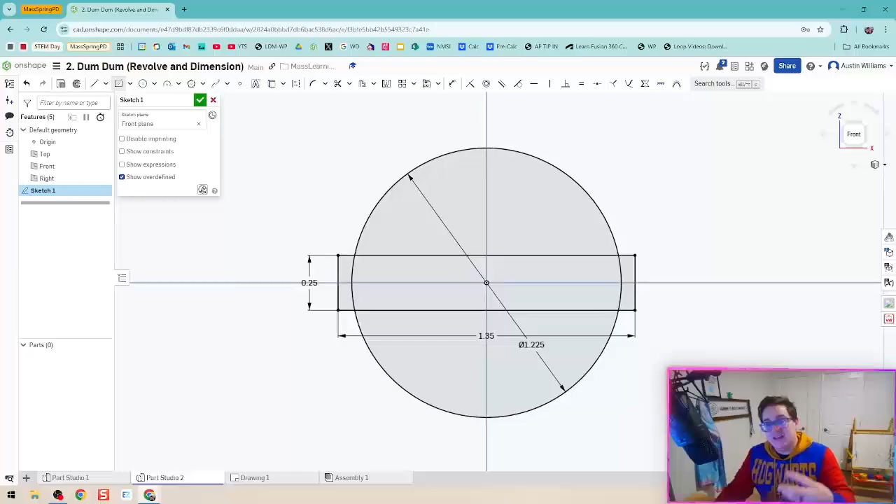Hit R for rectangle. We're going to look at that origin point, and we're going to click once at the center of that origin. And then the second click is going to be approximately where we want that rectangle to be. Again, we're going to type in those dimensions. That's 1.35 and then 0.25. Looks good to me. That second geometry we put in there, that rectangle, is now fully defined. Everybody's happy.

One thing we're ready to hop into is drawing our stick geometry, but we might run into a problem if we use a center point rectangle, because we're like, well, where's my first click gonna go? And trying to figure out, it's just difficult. So instead, let's use a corner rectangle. In this little drop down right here, you'll see corner rectangle is another option.

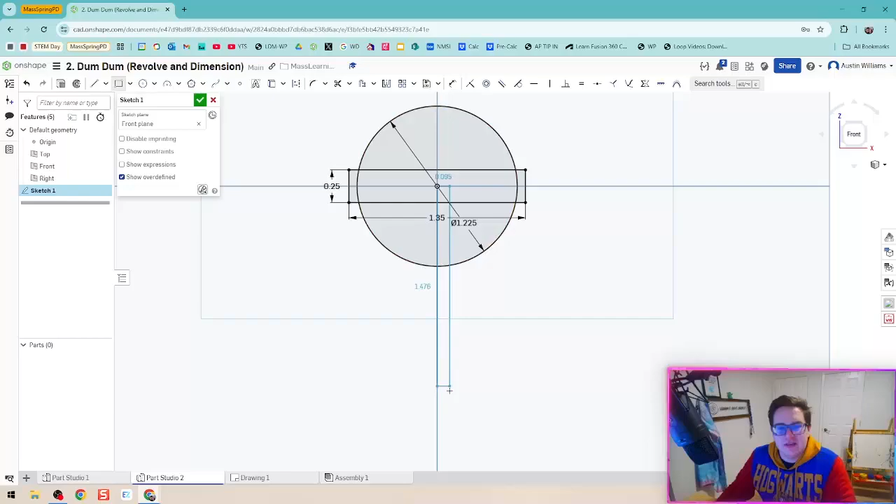First click is gonna be the center origin point. Second click is gonna be approximately where the other corner of that rectangle is going to go. Hit D for dimension, and that's going to be 2.5 inches in length, and then I have this as to be 0.125. Nope, 0.08.

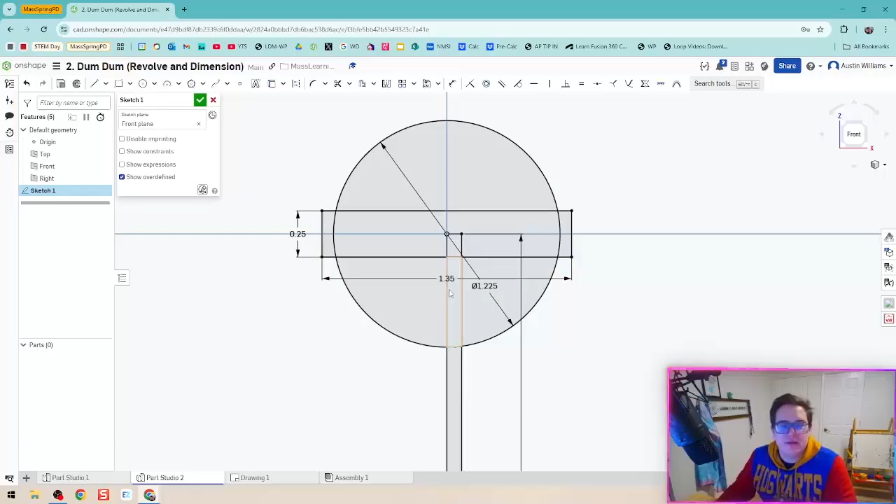Alright, what we've got so far is we have our profile for the sucker part, and then we actually have our profile for the stick. We're going to have to model them separately though, that way they don't come out to be the same part. We're ready to hit the green check mark, and we're ready to roll.

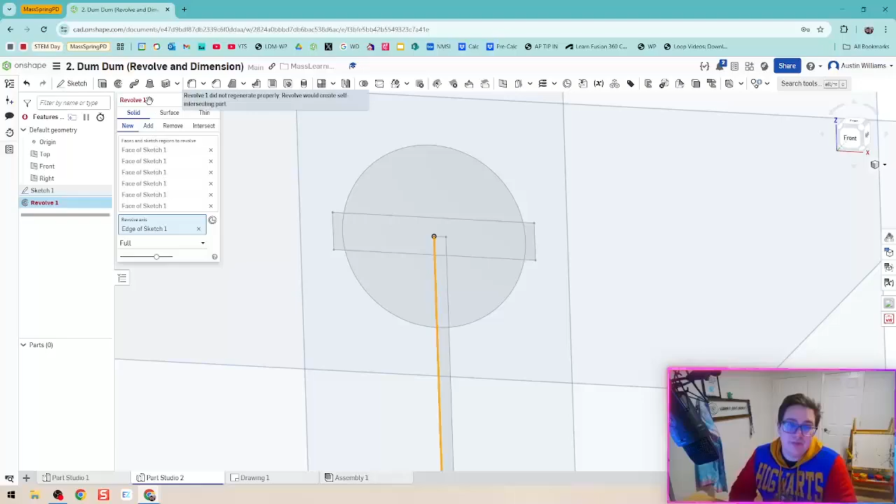Next thing I want to do is use that tool we have never used before called revolve, but we're going to run into an issue and we're going to fix it. If I try to use revolve and say I want this sucker to revolve around a center axis, you're going to get a problem, and it's going to create a self-intersecting part. When we revolve, we can't revolve a full 360 when we look at both sides of our sketch here. So we have to only have half of our revolve there to revolve the full 360. So let's hop in, let's check it out.

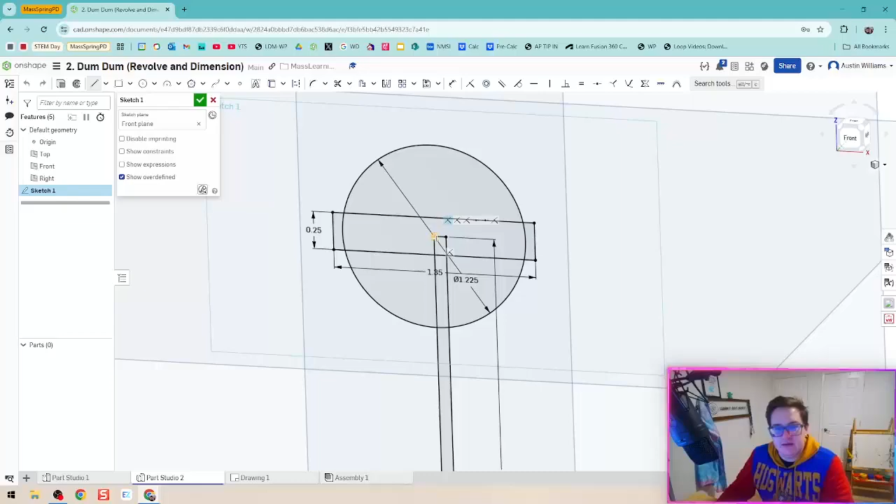So I'm going to edit that sketch, and I'm going to draw a line that's going to cut all the way down through my Dum Dum. So now I've got completed profiles on the right hand side that I can use, and that's what we want. This left hand, actually, we're not going to be using. So hit the green check mark. We're ready for the revolve.

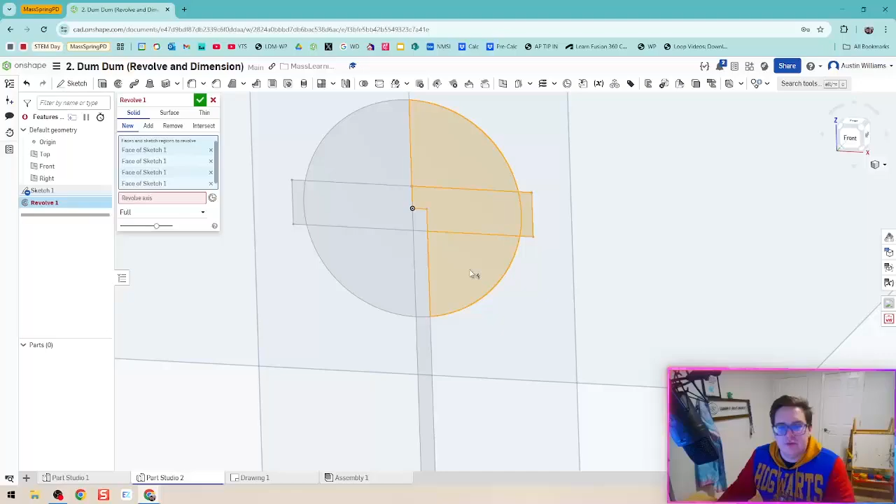Click on all of those profiles we want to revolve. The next question it's going to ask us is, what is our revolve axis? So we click on revolve axis, and then that center axis that we created, now we've got our Dum Dum sucker made. Hit the green check mark, and we're ready to make our stick.

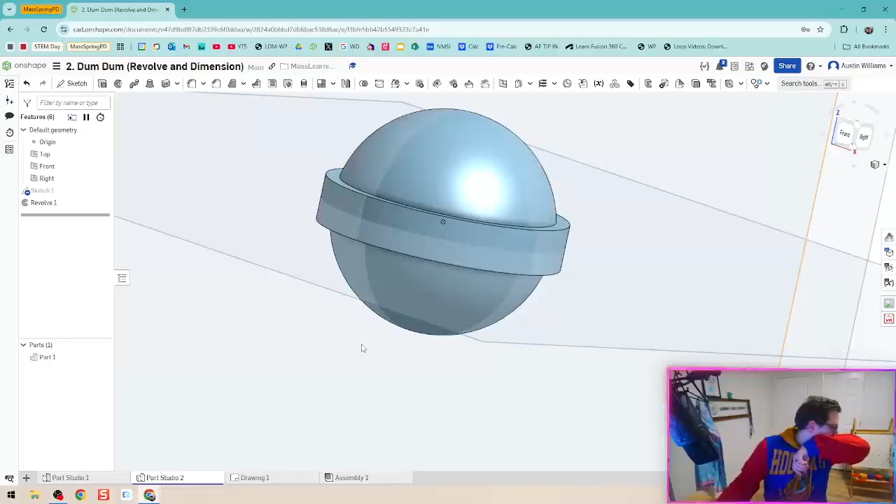Hopping into the stick, well, we notice our sketch is gone. So where did our sketch go? On the left hand side, you'll see your sketch is grayed out, and that's because it's been consumed. We are going to click on that little eye icon and make it visible again, and that way we can use it one more time. So I'm going to go ahead and hit revolve. Click on these profiles here.

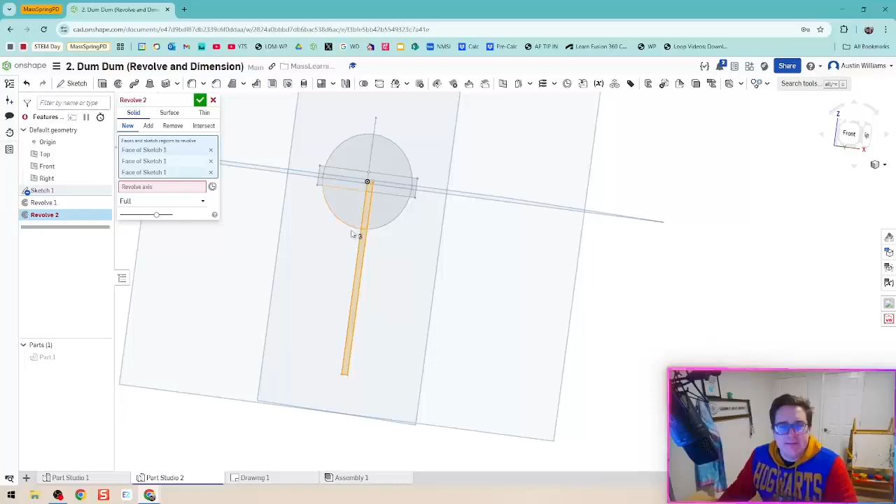If that first revolve is in your way, you can also toggle that part to be inactive. That way you can see those pieces a little bit easier. And then that revolve axis is going to be that center axis. Click the green check mark. And then make that part 1 active again. And there we go. We have officially made our Dum Dum.

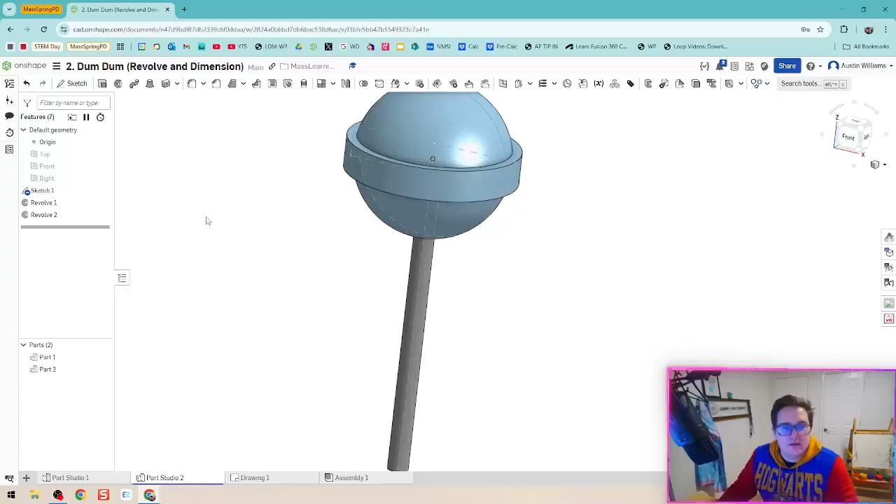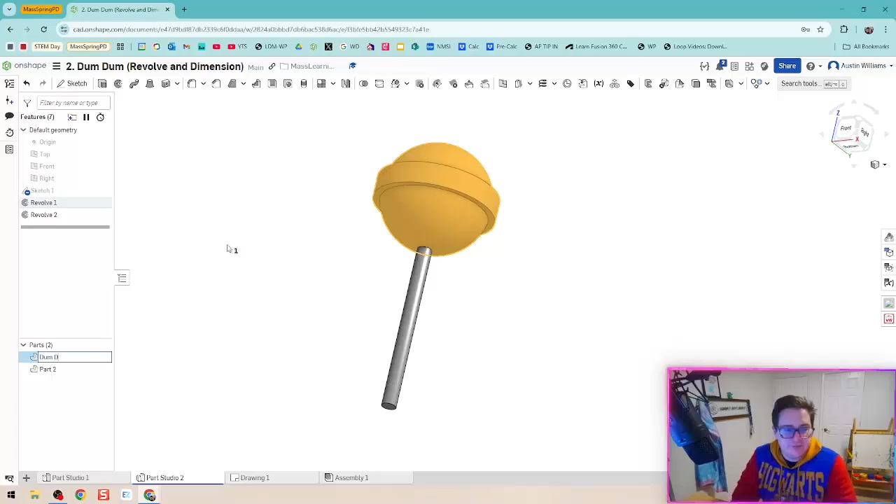Let's clean up this space a little bit. I'm going to go ahead and make my top, right, and front planes inactive, along with that sketch, so we can see only the things that we want to see. Now we're ready to do some other commands of changing this geometry that we created. One is we want to name it. When you get in the habit of using something, you want to make sure that you name it correctly. So right click, rename, and this is going to be Dum Dum. And then right click, rename, and this is going to be stick.

All right. I don't know about you, but in my opinion, the best Dum Dum flavor has to be blue raspberry. So we're actually going to apply a blue color to it. So I'm going to right click and edit that appearance. Let's find a nice blue color. Looks great. And then that stick is going to be white. So we're going to right click, edit appearance, and add a white color to it.

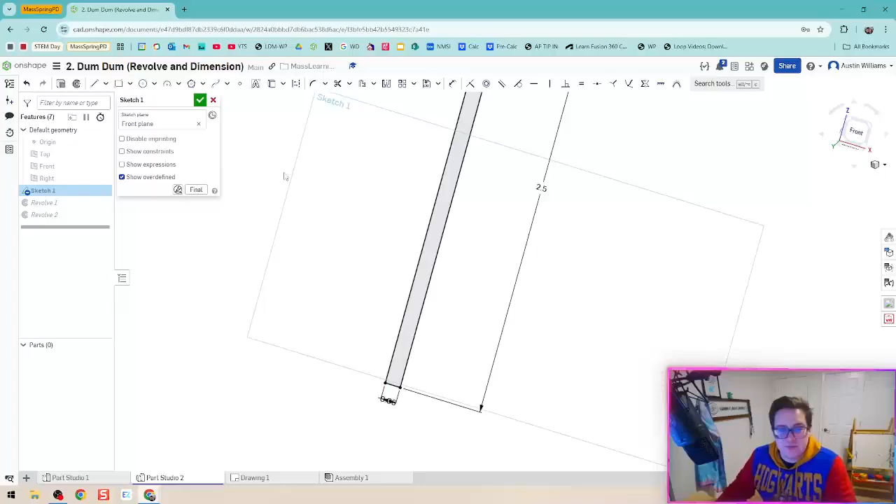I do notice a couple things. One, that stick looks a little thick, and so that number's probably wrong. So I'm going to come in here and edit that sketch, right click, edit. Come in here, and I believe 0.06 is what it's supposed to be. And that looks a little bit better.

Alrighty guys, if you got any questions, let me know. But we officially made our Dum Dum for part 2 of this OnShape 101 series.